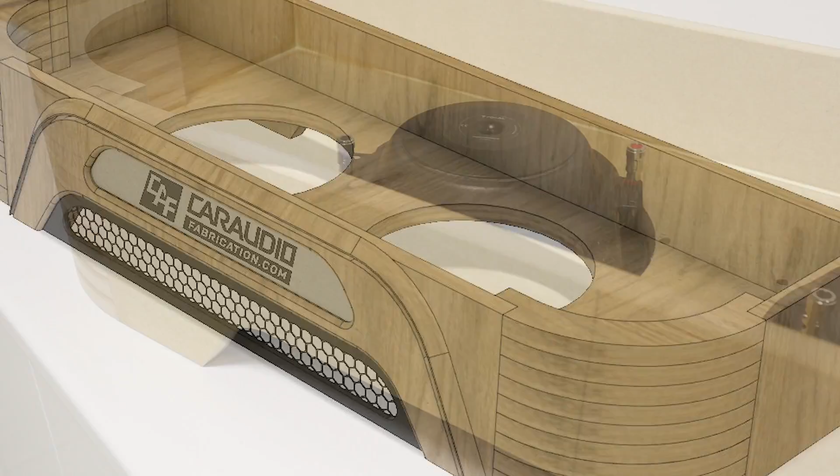Currently here on this channel, I've been working on a car audio system for a Grand Cherokee. You can see our system lineup here on screen, several amplifiers, several speakers, but in this video, we're gonna focus on our subwoofer system. I've been planning on using these Focal P30F 12-inch subwoofers in a sealed box, but you know what? I think I'm gonna do something a little bit different since I have these 10s that I can use. I'm actually going to do two different subwoofer boxes.

One box is going to be much larger, take up a lot more of the cargo area, but in exchange for taking up more cargo space, I'm going to get a lot more output by using the two 12s and probably something like a ported enclosure.

The other subwoofer box has the goal of being as small as possible, taking up as little room in the cargo area, so I can just have it for kind of everyday listening and going and getting groceries, that kind of thing, where we need to use the cargo space. And for that, I'm going to use two of these shallow mount 10-inch subwoofers in a sealed enclosure, and that is what we're going to be making in this video.

To kick things off, my friends, wham bam, let's come up with a plan, man. So to kick things off with a plan, I of course first measured the depth, the width, and the height that I had available within the vehicle. Once I had that, I opened up my modeling software and started to model this enclosure.

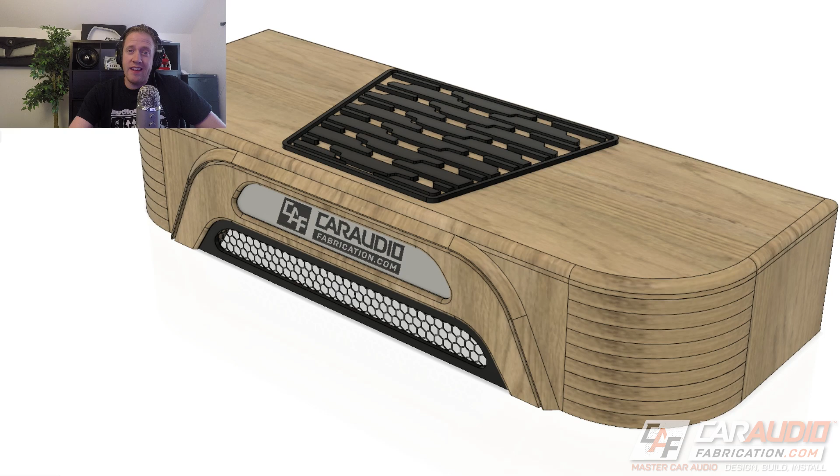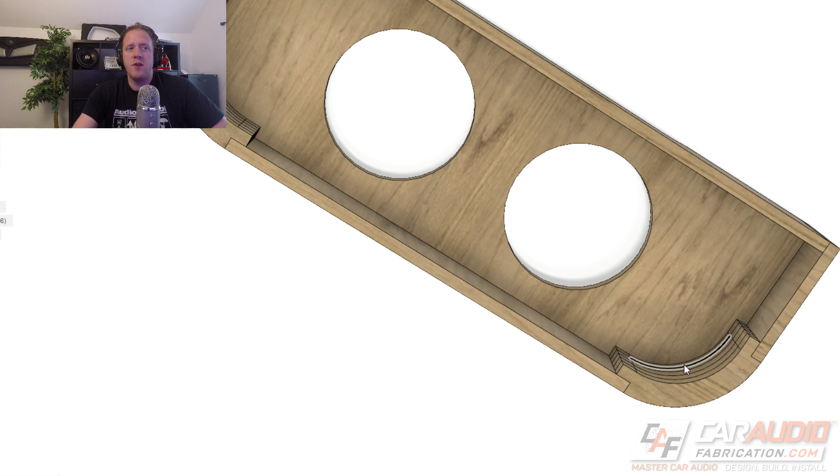Now again, the goals behind this enclosure are to keep it as small as possible, to keep the subwoofers somewhat hidden, and to keep them protected so that we can put cargo on top of this enclosure or in the cargo area without worrying about it hitting the subwoofers. By having these subwoofers in a sealed downfiring configuration, we accomplish those goals. One of the big reasons I like to go through the time of actually modeling this is it allows me to actually determine the exact internal air volume, even with these complex shapes in the corner, to make sure that I have the proper air volume for this sealed enclosure.

Now you can see I have some template work on the front here along with my logo, some grill mesh. I also wanted to match the look of the factory cargo liner on top of the enclosure. The cargo liner looks like this down at the bottom. I'm not going to be showing the addition of these templates in this video, but it'll be upcoming in a future video where I complete this box. In this video, we're going to be focusing on making this overall shell.

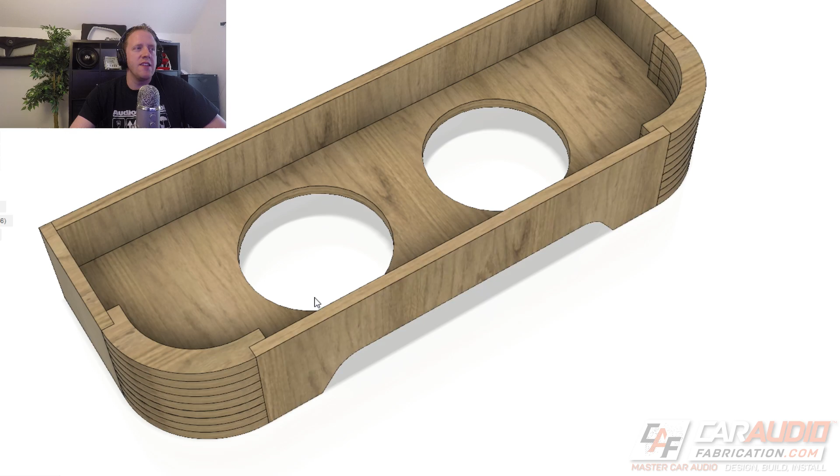We have our typical back, our two sides, our front piece, and you can see in the corners here that I've done a stacked type profile in order to give a rounded shape to each of those corners. I'm also going to have a cutout here on the front and on the back to allow the sound from the subwoofers to escape. Finally, the baffle that holds the subwoofers itself is actually one of the layers that is built in to this stack.

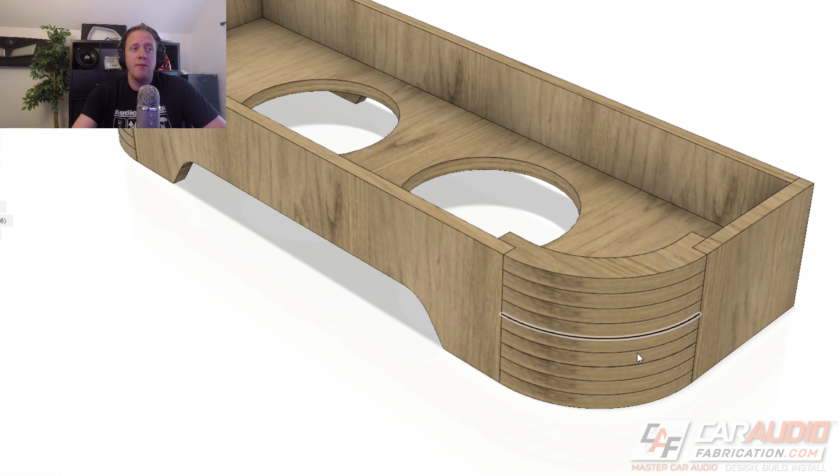These shapes in the corner here are unique. I'm going to show you guys a cool new tool that allows us to make them, or if you don't have a ton of tools, how you can actually purchase them and make these stacks on your own. So now that I have everything modeled, I'm going to put some dimensions on this and print myself off a little sheet that I can use for the build.

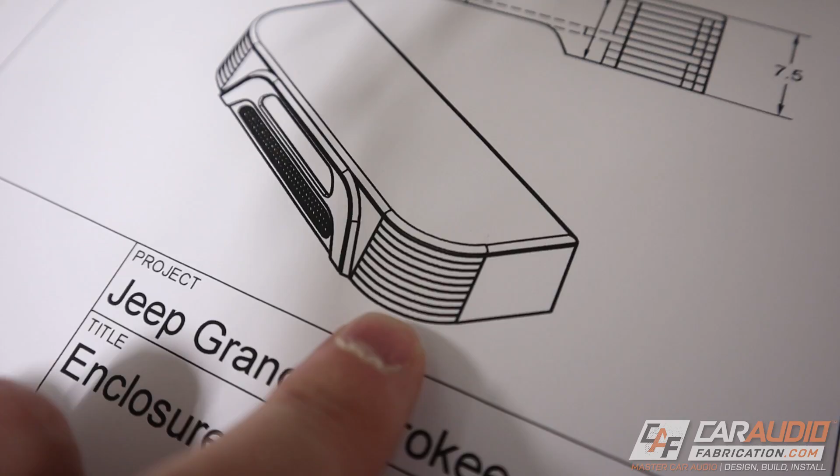And with that, I have all of the easy cuts done for the square boards. Now I need to make these corner profiles. To make these, I'm going to be using the new Mobile Solutions Quick Corners. You can purchase these as templates to copy and make your own, or you can buy them as the already made wooden pieces in a 20-piece kit, all of the same radius. The vertical wooden boards that I cut fit perfectly into this corner, which allows us to save a ton of material when it comes to stacking.

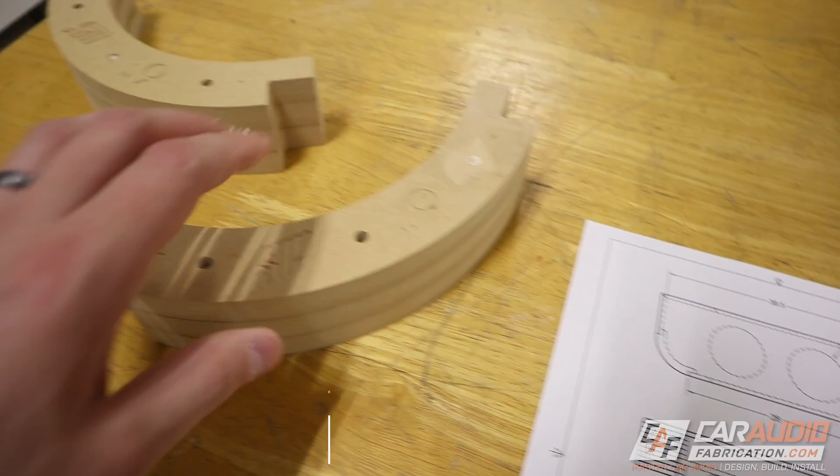The kit that has the wooden pieces requires very few tools. I can just apply wood glue, and then I can use the included dowels along with a hammer to assemble these pieces together. Now I've only built the quick corners to be 3 high so far because I am going to be doing downfiring, so now I need to attach the layer that we would call the baffle. The baffle actually has the cutouts for the subwoofer holes. I start with laying out the center location of each of these holes.

Now you could sketch out your cutout circle and then cut it with a jigsaw, but in my case, I'm going to be using a circle template because I want this cutout hole to be perfect and perfectly match the diameter of the subwoofer. I rough cut my holes on the jigsaw, and then I use double-sided template tape to stick the template in position, and at the router I'm using this flush trim bit which has a bearing on top that rides against the template and then flush cuts the material down below.

You can see by using the flush trim bit here on the router we get a really nice clean cut hole. It looks really nice and perfect. It will perfectly match our subwoofer. Cutting out the holes was the easy part. This baffle does have somewhat of a complex shape. I do actually need to allow some clearance for these vertical boards that are going to go on the side.

So I've marked out that cutout that I need to make. The same for the front board here. I need to cut and remove that material. And then these are going to permanently attach to the baffle because the baffle is actually going to have that curved geometry on it as well. So I'm going to get some wood glue applied to these. I'm going to brad nail them in place, and then I'm going to start cutting everything flush on the router.